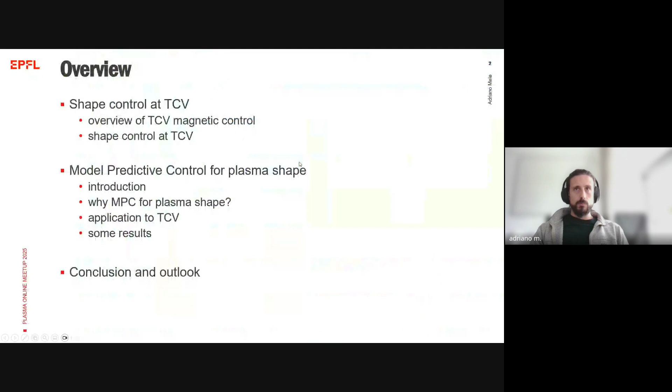Sorry. Okay, so just an overview of what I'm going to present. I will give you a quick introduction to how shape control is dealt with at TCV, with a quick overview of the core magnetic controller and a brief perspective on the recent development on shape control here at TCV. And then I will delve into the topic of model predictive control for plasma shape.

I will give a quick introduction. I will try to motivate why we want to have an MPC for the plasma shape. And I will show you some applications and results. And then I will briefly discuss some conclusions and outlooks on the topic, which might also fit nicely with what Georgi was presenting in his talk.

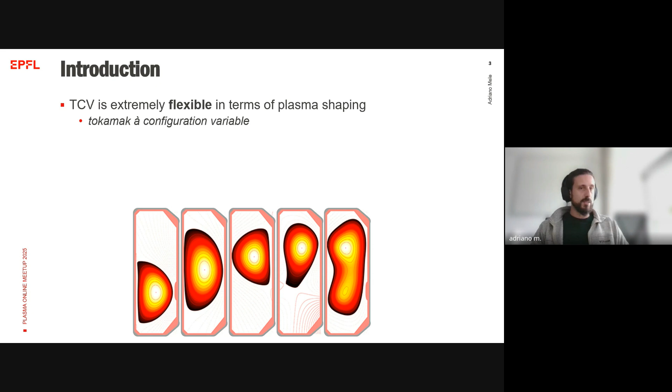So to start with, TCV is known to be extremely flexible in terms of plasma shaping. The name itself means tokamak with variable configuration, so it hints at the fact that it can actually realize a lot of different plasmas. And in standard tokamak operation, still nowadays, shaping is often obtained through careful feed-forward design,

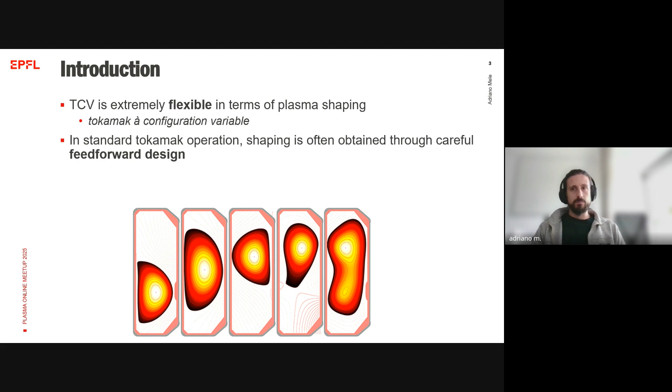and still we have good modeling tools available, as Georgi was telling earlier, and as I will also discuss later. And these allow for reliable design and offline testing of feedback controllers before deploying them to the actual machine. I see we also have Sarah here, who's from CREATE, which is the group where I was working earlier myself, and they are also experts in magnetic control, and they have their own codes.

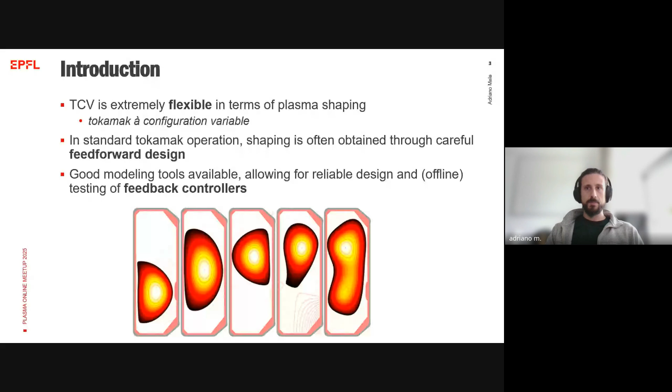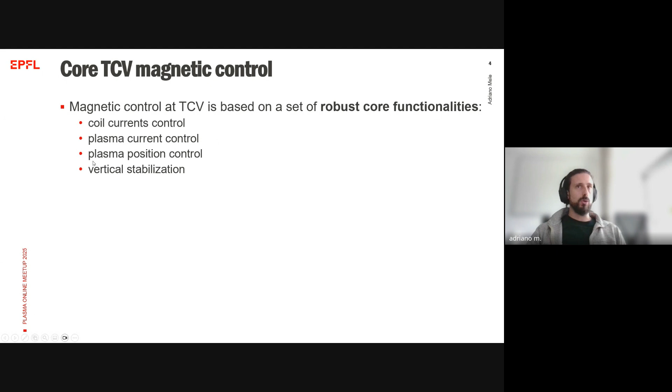So this is a field which is quite explored in the community, and we have different tools to tackle this task. The core TCV magnetic control is based on a set of robust core functionalities, which are pretty standard across tokamaks. And in particular, we have coil current control, we have plasma current control, plasma position control, and vertical stabilization coils.

In particular, at TCV, there are some peculiarities, and some combination of coils are, let's say, directly plugged to the RZ-IP control channels. So differently from what is proposed, for example, in ITER, where you basically have a coil current controller and then you give references to the coils, in TCV you are basically directly plugging these channels to the voltages applied to the coils, or at least to the current derivatives requested to the coils, which makes the analysis of the tools a little bit less straightforward, but it also makes the response a bit faster.

So it was a design choice that was taken in the early phases of TCV operation and that we have kept so far. Of course, since we are doing this, we are not controlling all the currents. We are just controlling the currents in an orthogonal space, which doesn't affect the directions that are used to control the core quantities, such as plasma position and currents.

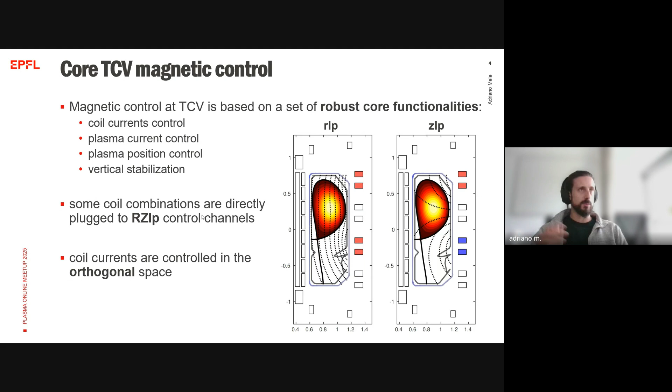So here is an overview of the core TCV controller. The structure is pretty simple. There's a classic coil decoupling plus, as I said, basic position and current control. So here I'm highlighting some of these blocks. The M and R matrices are basically the blocks making up for the current decoupling. There's a set of linear observers based on raw magnetic measurements, which are called the A matrix here at TCV.

And then there is a multi-input, multi-output PID controller that, again, takes these observers, computes errors on these quantities, and gives requests in terms of the derivatives of the current, which are then actuated through this decoupling block. The advantage of this structure is that there are few moving parts. The M and R matrices are basically physics-based. You don't need to invent anything here. The observers are also physics-based, and there are routines to obtain them. And basically, you just need to find suitable gains for these control channels.

which are in a multi-input, multi-output structure, but are mostly decoupled channels at this point. So the analysis and design of this controller is rather straightforward with standard control engineering tools. This works reliably in most cases and has the great advantage of being easy to set up and adjust for machine operators, who are the ones that ultimately have to deal with these tools every day. So we want to have something that is as user-friendly as possible for them.

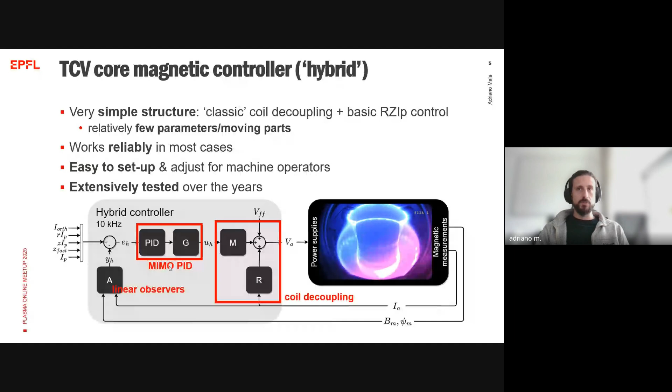And again, we have tools for feed-forward plasma shaping at TCV. As we say, plasma shaping is often obtained in tokamaks through careful feed-forward design. And at TCV, this is done with the FBT code, which is part of an open source suite of codes, which is called MEQ, the MATLAB Equilibrium Toolbox. And this is one of the lines of research that we are pushing forward here at the lab. So if anyone is interested in testing these codes, you can just ask access, and they are freely available, especially for research purposes.

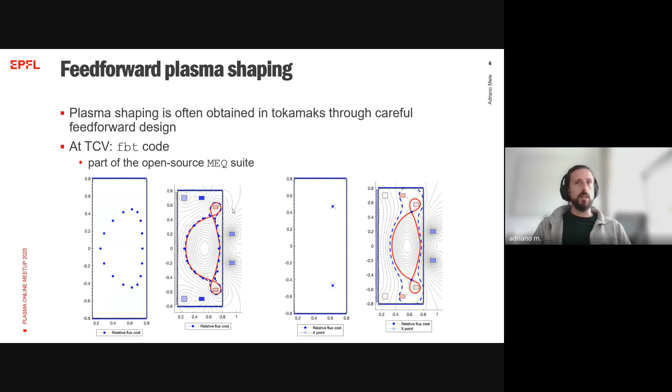Here is an example on a, let's say, example magnetic configuration. Basically, what FBT does, it allows the operator to specify a set of points, which can even be desired contour points or hard constraints, like X points where the field is forced to be 0. And then it solves the Grad-Shafranov equation to fit a solution to the requests of the operator. We have also a graphical interface for the users to play with this. And basically, this is the tool that is used before every discharge to design the current waveforms that go into the machine and allow to obtain the desired configuration.

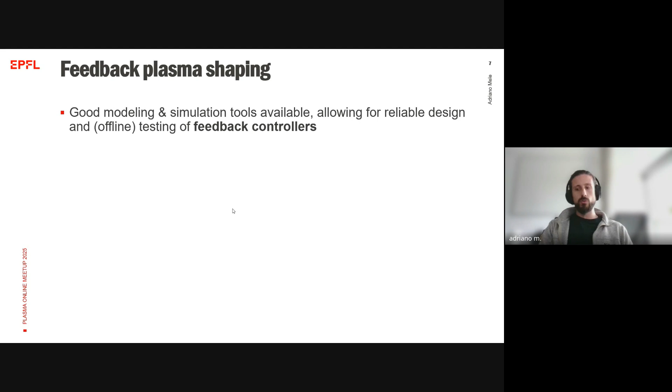But for feedback plasma shaping, as we said, there are good modeling and simulation tools which we can use to design feedback controllers. Some examples of these are the FGE or FGEL codes in the MEQ suite we have here. There's CREATE-L or CREATE-NL by the CREATE group, and Sara will probably tell more about these. There's TokSys by General Atomics. Now I've learned there's this FreeGS suite from UKAEA. There's the NSF simulator that Georgi was presenting earlier, and many other codes.

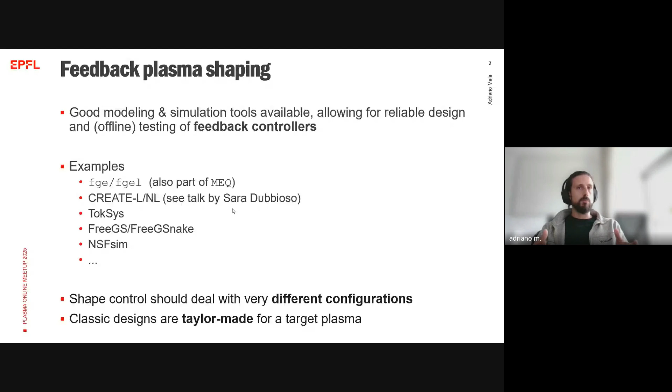Two main points regarding the design of shape control is that these kinds of controllers are expected to deal with very different configurations, especially in a place like TCV. And classic designs for shape control are tailor-made for a target plasma. Think of the XSC used at JET. You take a configuration, you usually linearize around the configuration to get an intuition of the behavior of the plasma, and then you use that model to inform the control design technique.

We also had a list of nice-to-haves when we started this work. So in general, shape control should be mostly automated, because since it's, again, tailor-made for the specific configuration you have, you don't want the user to be messing with the parameters before every discharge. You should have some pipeline that basically takes design parameters and gives you something which is reasonable enough. And the set of parameters which is exposed to the operator should be as small as possible.

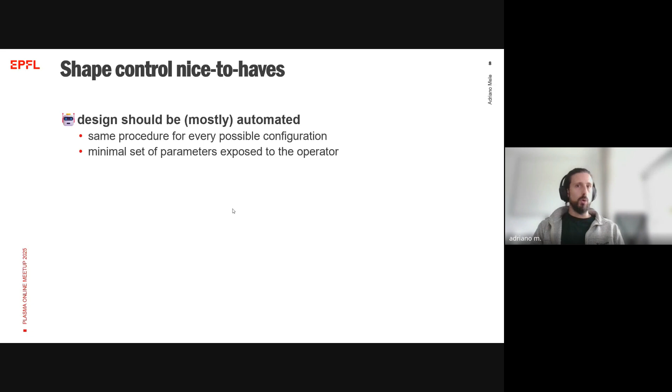It should be highly reliable. Again, it should give reasonably good performance on most scenarios with the lowest possible effort. It should be easily reconfigurable in between shots. And I would say that this is where most AI approaches still fail today, because they usually take time to be retrained if something goes wrong, and they are not really at the point where these tools are general enough to be used for day-to-day operation. Of course, maybe we'll get there sometime soon. And also, the controller should be well integrated with the shot preparation tools, ideally with basically the same interface that the operator sees when he's preparing a discharge.

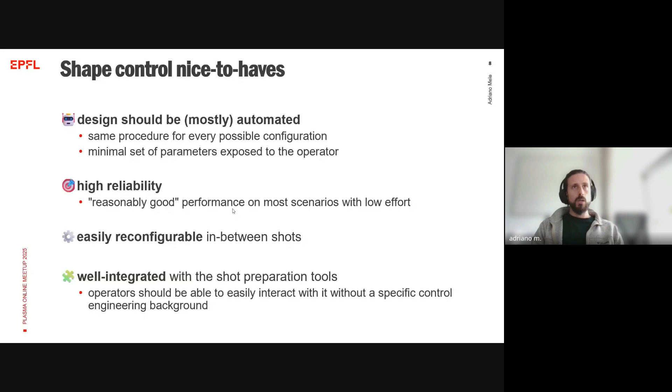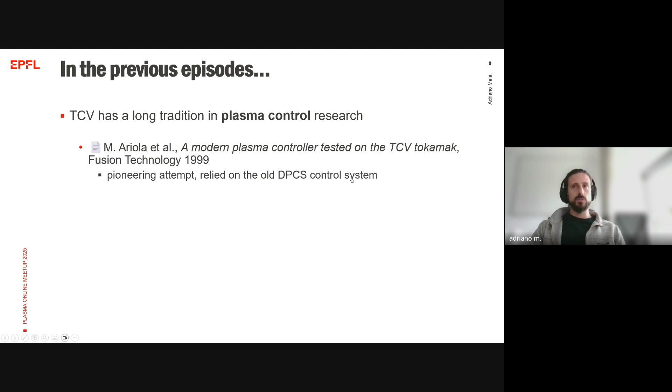TCV has a long tradition in plasma control research. The first effort dates back to the 90s. For example, there's a paper, again, by the CREATE team, where they were trying to use an H-infinity formalism to control some descriptor of the shape, such as triangularity or elongation. This was a pioneering attempt which relied on the old DPCS control system, which is now not operating anymore.

There was very nice work by Hemang Anand, who I think is now at GA, where he basically redesigned the shape controller from scratch. This work did not reuse the existing architecture, so it was sort of a parallel track with respect to what is used in, let's say, standard TCV operation. So in the end, mostly due to time limitation, this never really was merged into the standard workflow of TCV.

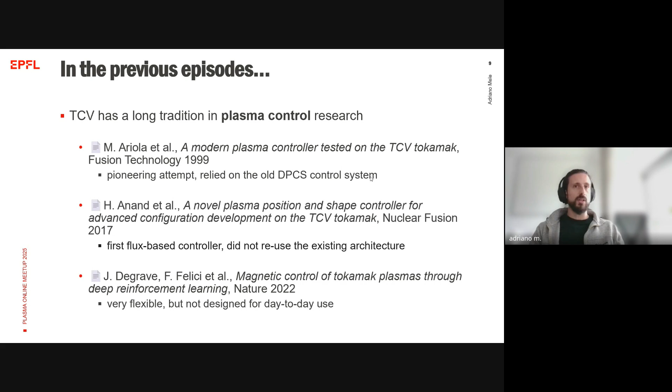And of course, there was the Nature paper that was also cited in the previous talk regarding reinforcement learning, which provides a very flexible tool, but which was not designed for day-to-day use, as I was arguing before.

So the approach we adopted more recently, that was presented at a conference last year and is now being accepted for publication in PPCF, is what I call the onion scheme shape control, which is basically a PID-based hierarchical architecture, which keeps the core magnetic control of TCV and builds on top of it. And so the shape control gives references to all the channels of the core magnetic controller I was showing you before, including currents, but also plasma position. In TCV, the IP channel is decoupled from the magnetic configuration. So in this case, it's mostly plasma position.

Note that this is a quite common approach in tokamaks. As I was discussing in the beginning of this talk, in many designs, we have a coil current controller, and then we have external loops such as position or shape, which provide the references to the currents that are then tracked in real time. And often, this is not the case at TCV, but it's the case in bigger devices such as ITER, for example, or EAST. The vertical stabilization has a dedicated actuator which takes care of stabilizing the plasma, but it's not involved in position or shape control.

The pros of this approach are that the procedure is fully model-based. We have a model of the core controller and a model of the plasma based on the FGE code, and we can automate the design of the shape control as much as possible. The core magnetic control is, of course, ready out of the box. We have this architecture which is extensively tested throughout the years, and we are still using that. And also there's no need in particular to deal with the vertical stabilization of the plasma, which is one of the most delicate loops in plasma control.

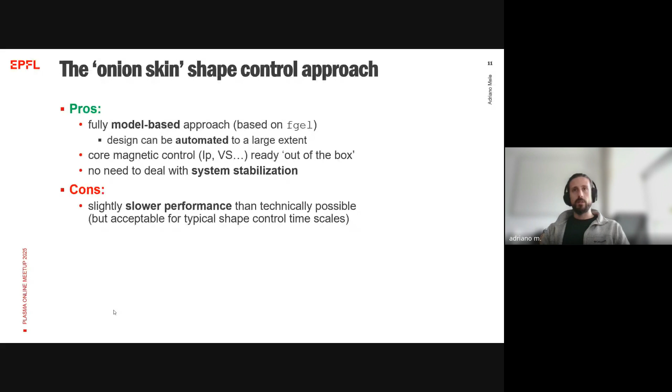The cons of using this, let's say, nested architecture is that the performance is slightly slower than what is technically achievable with a direct plug of the control channels to the coils. This is still acceptable for typical shape control timescales, and for situations where faster response is required, we have other techniques that we are exploring to make things more aggressive in terms of control performance.

For our design, we chose to adopt an isoflux approach, which is slightly less interpretable, but faster to implement with the tools we had. And we also have a way of converting isoflux errors into gap errors in the framework of this MEQ suite of codes that we are using.

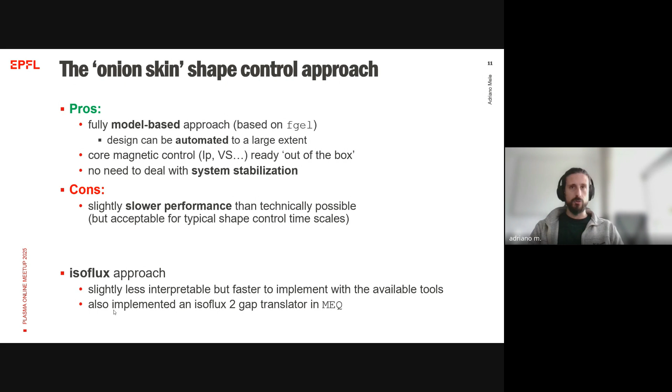So the way the controller looks, this is just an overview. I won't go into the details. So the top part here is the same control architecture that was in my previous slide, and then we add an external loop which takes feedbacks from a real-time equilibrium reconstruction, projects them into quantities that should be controlled by the shape controller, and then has basically a PID plus filters with some pre and post projection matrices that allow us to use the control directions in an effective way.

So this was the first implementation we had. I'm just showing this as a reference because now from this point, we will move to the substitution of this block here with a model predictive controller.

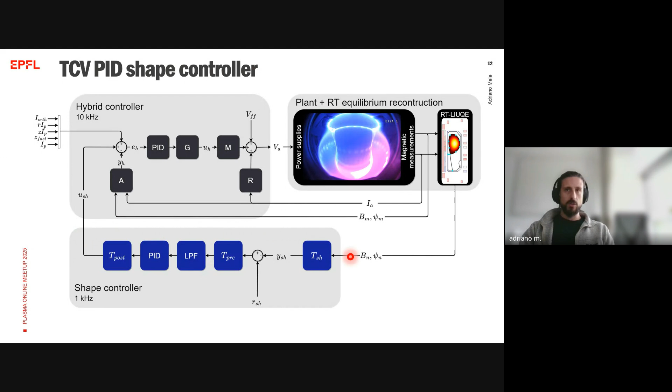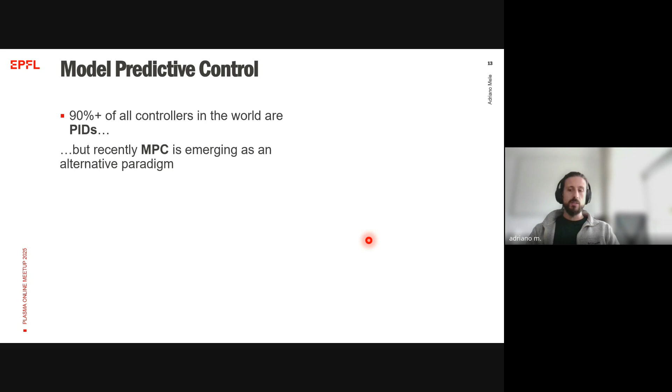We take the first sample of the optimal trajectory over the horizon we are considering, and we apply it to the plant. And then we shift everything forward by one sample and, let's say, rinse and repeat. We repeat the process over and over at every time step.

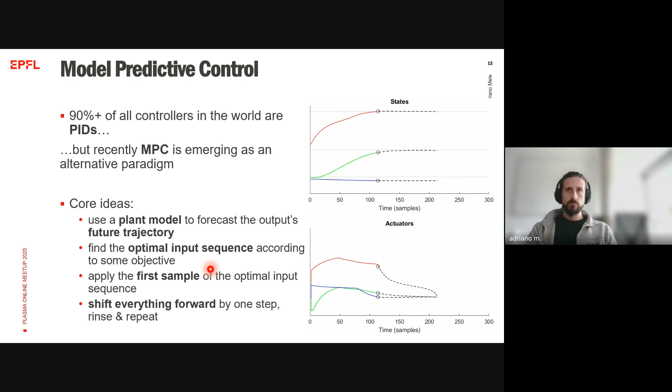So why do we want model predictive control? The first reason to have model predictive control in the context of plasma shaping is that it can handle soft or hard constraints. Sorry, this is a typo. It can handle soft or hard constraints. This could be coil current saturations, limits on requested voltages, plasma wall clearances, for example, or the maximum distance between multiple separatrices in the case of multiple X-point configurations, and so on and so forth.

So this provides a very powerful way of enforcing, with soft constraints, adding high weights on the violation of some operational limits, or really forcing the solver to pin some desired quantities to the value that they should get. For example, where you don't want to exceed saturations and you want to have a very, very tight distance between different X points.

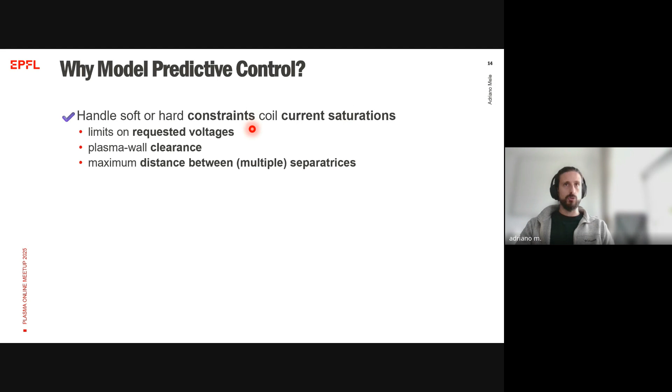It has predictive capabilities, which allow to compensate ahead of time for known events, which helps minimizing the lag time when references are moving, and this happens, for example, in response to asynchronous events. So imagine you have a soft landing scenario where you want to ramp down the discharge, then you can sort of adjust in advance to follow the trace as closely as possible.

You can use different models also during the same discharge, which provides a way of cleanly switching between one plasma target configuration to another one. And also you can use the additional degrees of freedom to satisfy secondary objectives. And this is something which is really felt in TCV because we have many coils available, and so we can use some of them to achieve other things which are not the main objective of the controller, which is just bringing the plasma close to the reference.

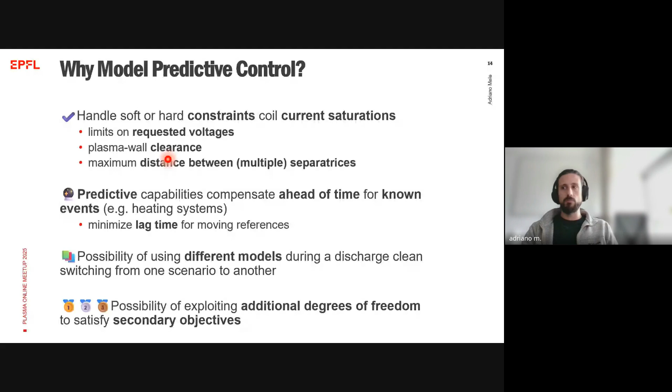And some examples of these could be, for instance, keeping the coil currents low or minimizing the injected electrical power into the machine, or for example, handling forces on the structures, things like that.

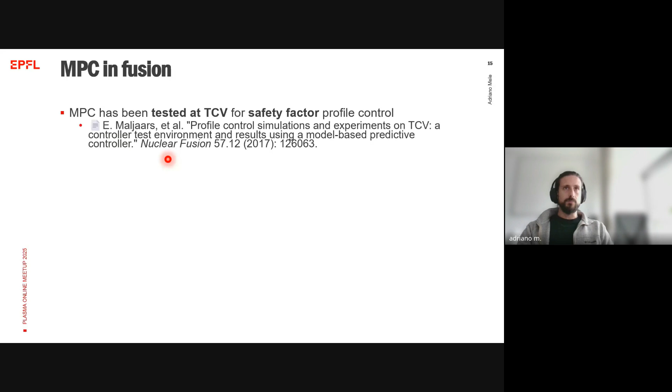MPC in fusion in general is a concept which is not completely new. It has been tested at TCV before for safety factor profile control, and there's a nice work, actually the PhD thesis of a colleague from DIFFER, Bert Maljaars. It has been proposed for other tasks such as density control or stored thermal energy control, also internal inductance and other examples. And MPC-based plasma shape control was also proposed for future devices such as ITER or DEMO.

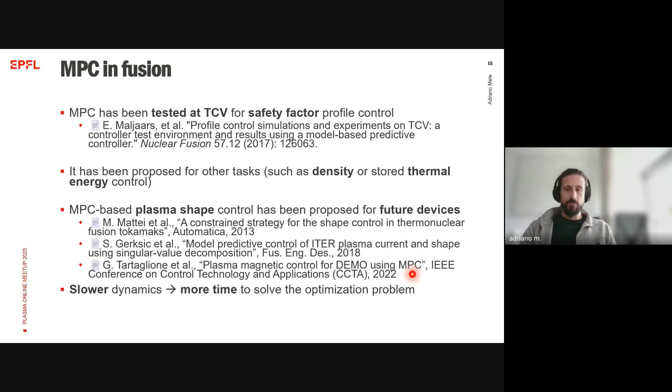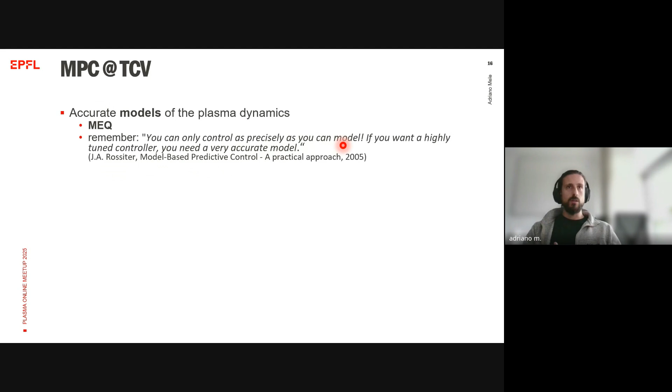In TCV, we have, let's say, all the ingredients we need to design an MPC controller. We have accurate models of the plasma dynamics. Again, we can rely on this MEQ suite of codes. And as reported in the book by Rossiter on model-based predictive control, you can only control as precisely as you can model. So if you want a more accurate controller, a more tuned controller, you need a more accurate model.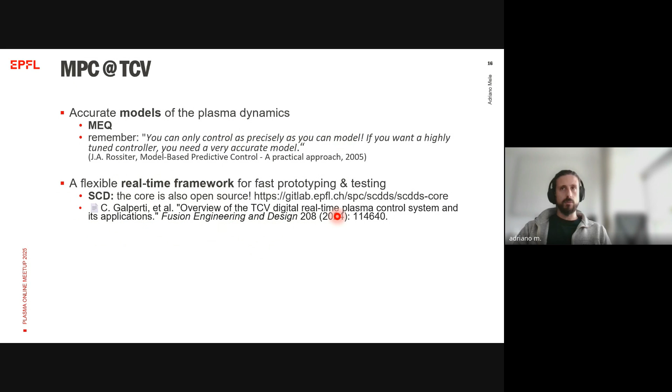We have also a flexible real-time framework for fast prototyping and testing. This is called the SCD. And the core of SCD is also open source and was adopted by ITER as their control system. There's a recent publication on this by my colleague Cristian Galperti that recently came out just at the end of last year in Fusion Engineering and Design. And also we can rely on efficient optimization solvers as we are putting our problem in a standard quadratic programming form.

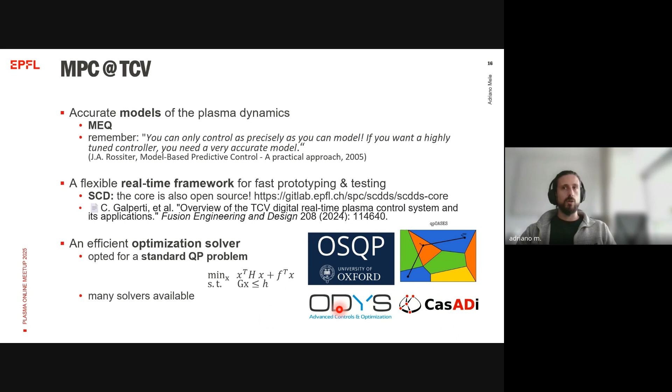And so we have many solvers available. Here I reported some examples. There's OSQP by the University of Oxford, there's qpOASES, CasADi, the one by the ODYS company, and also many other open source implementations that can be used.

So the way the controller looks like is something like this. The part that is highlighted as prediction model is the core hybrid controller, which I condensed into a single block for simplicity. The plant model with the power supplies and the diagnostics and the reconstruction equilibrium code, which provides the desired feedback for shape control. All of these can be embedded into a single state space block.

Of course, we are linearizing, in this case, the dynamics of the plasma. And this model can then be given to MPC to generate forecasts of the output trajectories, and then to formalize an optimization problem in a preprocessing stage. Then the problem is solved through a standard QP solver.

And then the other part we have is a Kalman filter, which is necessary to estimate the current state of the plant. Because, for those who are familiar with tokamak control, the state of the plant is given by all the currents flowing in the machine, including the ones induced in the passive structures, which are usually not measurable directly. So we decided to have an observer to estimate the current value of these states and to use that as an initial condition for the trajectory forecast done by MPC.

In particular, we use a reduced order Kalman filter. We have seen that a few tens of states are enough to get reliable enough performance. And we decided to adopt a velocity form for offset-free tracking. This is pretty standard in MPC. Alternatives might be using disturbance estimation models, but this seemed to work well enough for our purposes.

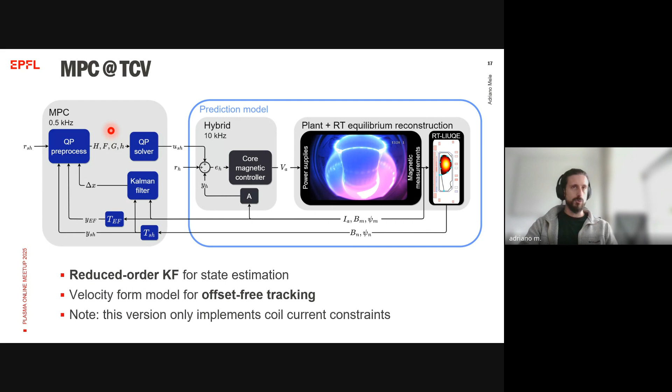Of course, computational efficiency is key for MPC, as we only have a handful of milliseconds. I didn't mention it in my previous slide, but actually this MPC is running with a 2 millisecond pace, and the optimization problem arising from this has around 50 to 60 optimization variables and a few hundreds of constraints. So it's a decently sized problem. It's not the smallest one I've seen. So we need to be efficient.

And the idea here is to pre-compute matrices as much as possible, to reduce the optimization problem by using reduced state representations, or maybe SVD decompositions to reduce the amount of degrees of freedom used by the controller. You can reduce the controller horizon by only optimizing over a subset of the prediction horizon. You can apply constraints at every other step. And you can try to choose your solver wisely, possibly using warm start where possible.

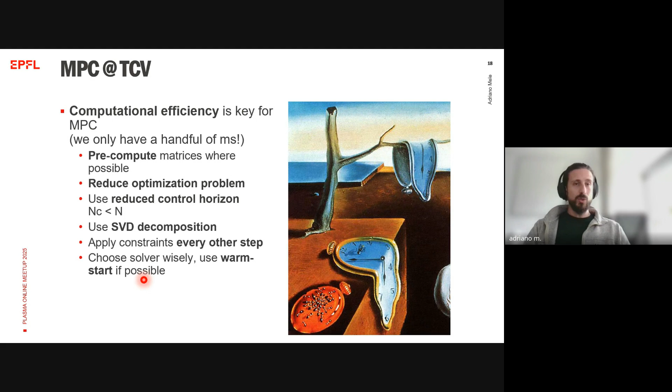So as I'm already at 25 minutes, I will quickly go over some results. The first example I'm showing here is fast shape variation tracking. We took one of the TCV standard configurations, and we asked for a vertical displacement plus a change in elongation. The settling time of the controller is in the order of a few tens of milliseconds, which is quite faster than what we had with PID-based control.

There is some residual ringing that you can see. This is attributed to the interaction of this controller with the VS system, and it's currently under investigation. This is probably due to some non-ideality in the way we model the VS circuit, maybe in the power supplies. And indeed, you can see that these oscillations are slightly reduced when we go in the phase where the elongation is reduced, which means that the growth rate is probably decreasing, and hence the vertical response is more gentle, and the oscillations are also suppressed.

You can also see that during the displacement, this strike point is moving a bit around, but actually this is not a big concern in the sense that there is a big null point region here. So even if the leg is moving by a bit, the flux error is not that big because the gradient of the flux is almost flat here.

Of course, we can enhance the control performance by increasing the weight on this channel, but as far as the control demonstration goes, this is something that is perfectly explained by the theory behind the controller. So it's not a miscontrolled channel. It's a result of how the optimization balances the different objectives.

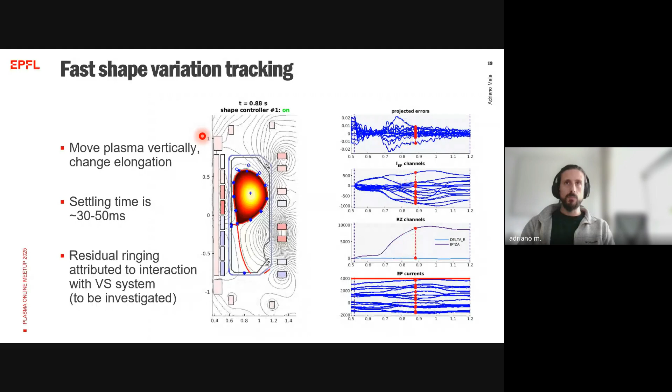The same scenario is repeated here, but saturating coils. So you see that we fictitiously reduced the saturation limit of one of the coils to 2,500 amperes, while keeping the other ones saturated at 3,500, which is still a lower limit than the actual limit of the TCV coils. You can maybe see here at the beginning that one of the currents starts outside of the saturation limit and is then brought back into this region, this safe region.

As a response to that, other currents are ramping outside of the 2.5 kiloamps, but they are still limited at 3.5 kiloamps. And you can see that they are never exceeding this threshold. You see that the response during the elongated phase is slightly different. We don't have the fast recovery we had before, but we have this sort of flat region where the error is still reasonably small, but of course we have to trade off the shape accuracy with the constraints that we are imposing on the optimization.

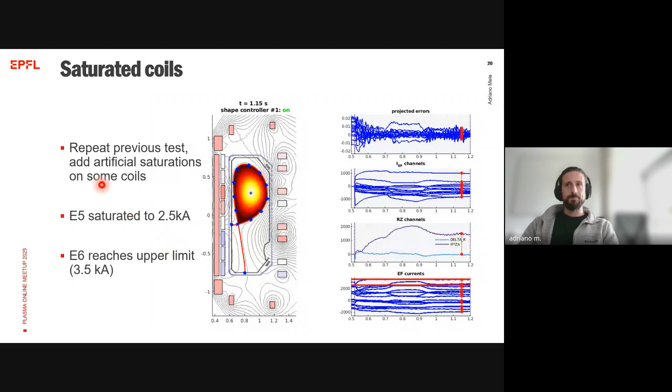And finally, the third case I'm presenting here is adding a secondary objective, which in this case is current norm minimization. In this case, we are keeping the shape steady. We are not changing it anymore, but we are adding current norm minimization as a secondary objective in the optimization process. And here you see a comparison between the baseline case, where the shape is not controlled, and the currents have an RMS below 6 kiloamps.

Then we have the black dashed line, which represents the case with control, but without minimization of the currents. And you see that the current RMS rises up to 6.5 kiloamps, sort of. And finally, the dotted blue line is this discharge. In this case, the controller was switched on slightly later, so you will see a bit of a shift. But you can clearly see that the currents start ramping and then are brought back to the levels of the baseline discharge.

So in this case, the weight on this objective was not very high, because we still wanted to retain a good accuracy in terms of the plasma shape, but you can of course increase that if you really want to reduce the currents used to achieve the shape, and you are willing to trade them for less accuracy on the plasma control.

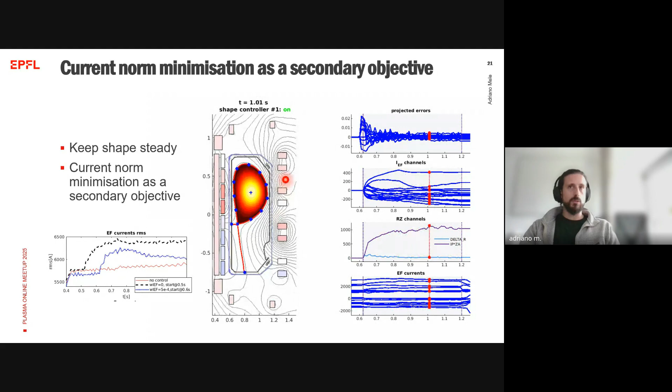To summarize, MPC offers a flexible solution for the problem of plasma shape control. We have seen that it provides a good control accuracy. It has an effective way of handling constraints. It allows to exploit effectively additional degrees of freedom, and it has, of course, predictive capabilities which enhance the tracking of moving targets. And also it can be enhanced in several directions. So, of course, there are robust or adaptive formulations of MPC which allow to deal with uncertainties.

Constraints can be formulated in a more flexible way, so allowing to deal with different quantities at the same time. We could use AI-informed models or reinforcement learning plus MPC combinations, which are topics which are emerging now in the MPC literature and are, I think, very promising in view of the task of controlling a fusion plasma, and many other points. Let's say the takeaway message here, what I learned working with MPC and fusion, is that AI is good, and it's a very flexible and powerful tool to deal with very complex systems such as fusion devices.

But I think we also have very reliable control tools which have been developed across the decades. And I think the most effective way of dealing with this sort of thing is combining the two domains to get the best of both worlds. So we can have, for example, machine learning informed models which are able to capture dynamics which are more complex to tackle, but you can also have, for example, analytically grounded optimizers which give guarantees on the optimality of the solution and on the handling of constraints and so on and so forth.